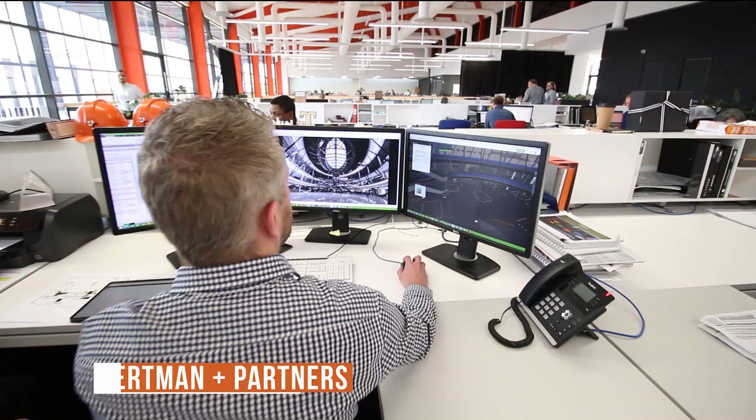Good afternoon, my name is Henny Kutsia. I'm the project director at Boogertman and Partners. We're responsible for the Fourways Mall development.

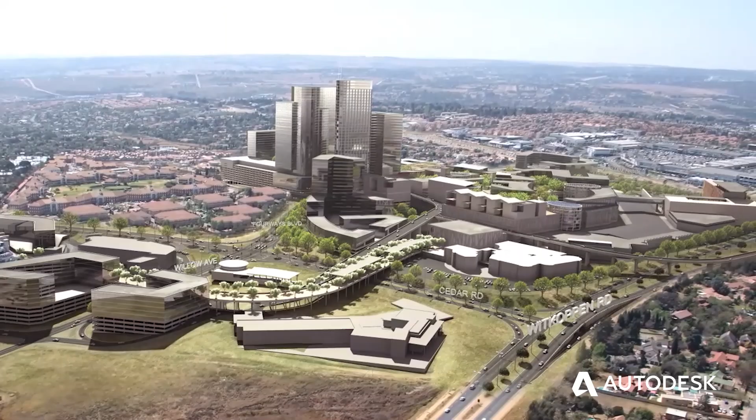10 years ago we were engaged by our client to do the master planning of the whole Fourways precinct, which will allow a total development in a mixed-use fashion of 1 million square meters over time, of which Fourways Mall is the first phase of this particular rollout into the future.

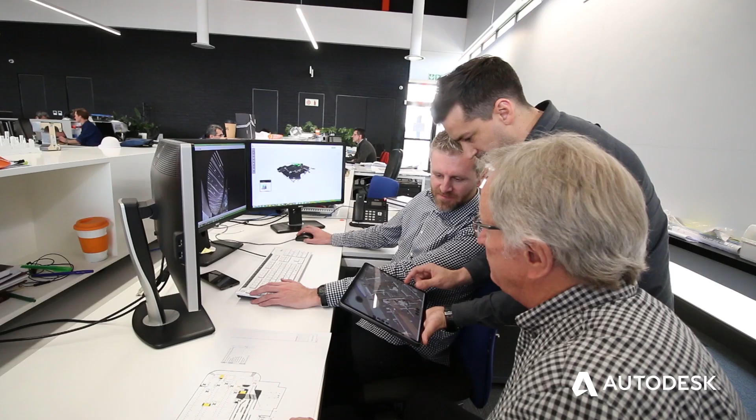Normally on a project of this scale, there are various disciplines involved, from ourselves as architects, structural engineers, civil engineers, mechanical, electrical and wet services engineers, and also town planners. The project is normally led by a project manager as principal agent.

The future plans for Fourways Mall is to turn it into a major economic hub. The area already has a lot of retail, a lot of accommodation, but they want to improve the business. There's going to be a convention center, hotels, offices, additional retail, investing over 10 billion over 10 years in the area.

Fourways Mall, being their pride of portfolio, is the first stage of this multi-phase development. The mall has been designed in such a way to accommodate future phases upon it and around it in the opening sites, including towers, hotels built on top of the shopping centre, additional parking. So in 10 years' time, Fourways Mall will be the catalyst for a completely different area.

Hello, my name is Herman Otto Vodenbender. I'm the BIM manager for Boogertman and Partners. I've been assisting on the project with implementation of digital tools and different technologies in order to facilitate the design, the documentation and the construction of the Fourways Mall expansion.

I think this project is really important to highlight. It will never be possible without creating a truly collaborative environment through all the consulting companies around it. We've got plus or minus 25 different companies.

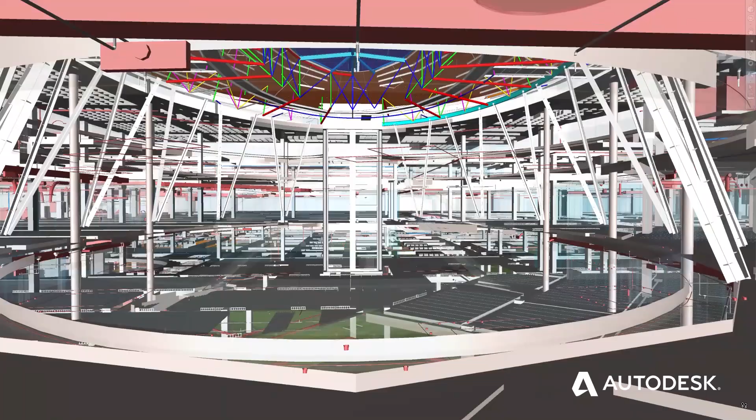As Henny Kutsia, our director, said, at the beginning of the project we made an agreement with the client that this is going to be a full BIM environment. All the companies took up the challenge, and especially leading between Boogertman and WSP, we lead all the coordination process. None of this would be possible without the collaborative environment that we pitch between all of us. So I think one of the most important things of any BIM process is about fostering collaboration, and then the technology and the digital tools will follow that process.

Hey, my name is Rakesh Rajkumar. I work for Boogertman and Partners. I'm the project technologist for Fourways Mall. I'm responsible for the VDC, Virtual Design and Construct elements for the mall, and also MEP services and structural coordination on BIM 360 and Team.

We have found that using BIM 360, especially on a project of this scale, it was necessary to reinvent some of the workflows, methodologies and protocols in order to make sure that Revit doesn't just work independently, nor does BIM 360. So with Revit being coupled to the power of BIM 360, it has provided our team and our consultants with predictable outcomes that were tangible enough to understand easily and effectively on a weekly basis.

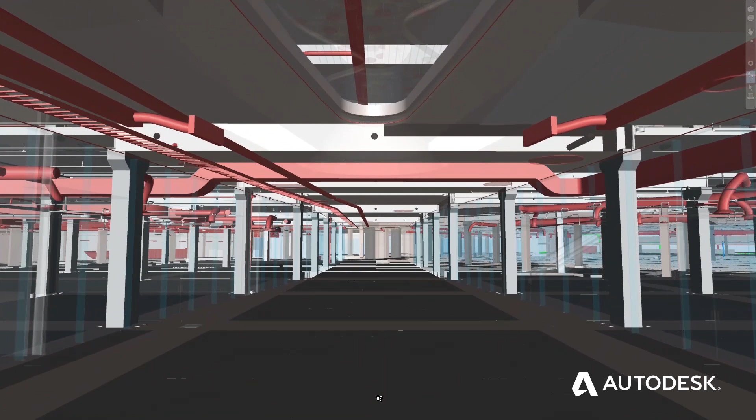With us using BIM 360, it enabled us to utilize our iPad Pro on site. It gave us the power to inspect any portion of the building while having all the current drawings of our architectural team and the consultants, so that timeous decision making was made without having to wait to refer to drawings or come back later on site via emails that didn't work, making sure we get the right answer right the first time.

Modena is an Autodesk Gold partner, so we connect with Boogertman and Partners. We are the technology partner of choice. We provide the Autodesk software and we streamline their workflows, do audits on their work and their projects, basically to provide efficiencies and do what we can to make their projects suitable and more efficient as much as we possibly can.